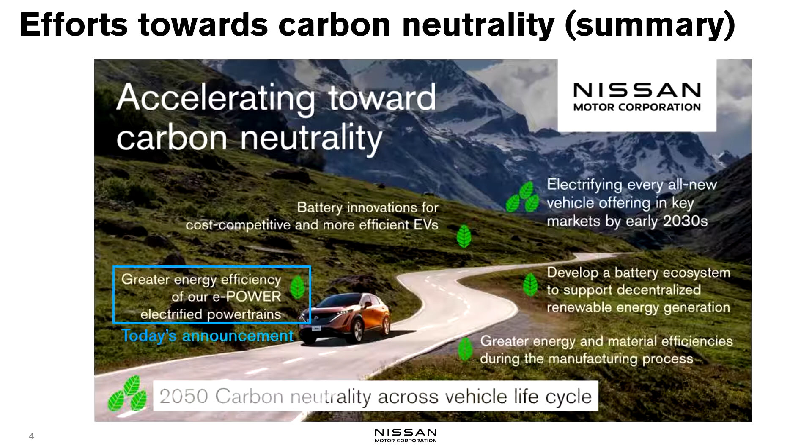As a specific example, these are the 4 actions we are taking that have been announced. From the left, we have greater energy efficiency of our e-power electrified powertrains, with a more thermally efficient EV. We are innovating battery technology and developing a battery ecosystem to support decentralized renewable energy generation, and greater energy and material efficiencies during the manufacturing process. These are the 4 areas or actions we are taking, and today I would like to focus on e-power with better energy efficiency.

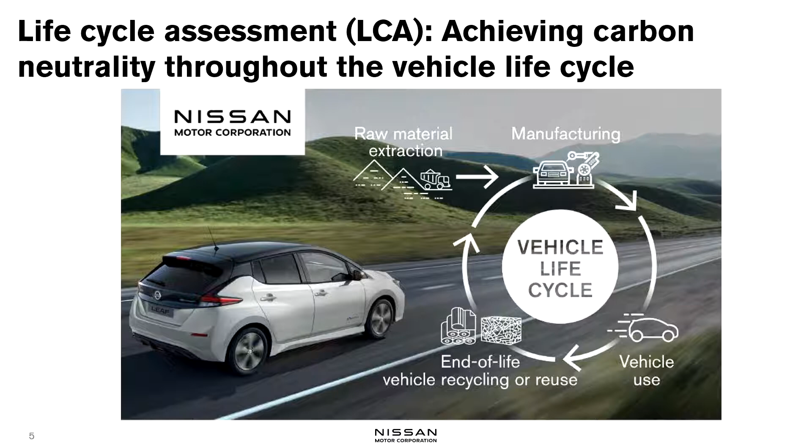Our approach to carbon neutrality is based on life cycle assessment—an entire life cycle assessment. It's not only about introducing carbon neutral vehicles. We are looking at the materials, mining, the entire life cycle, and the entire value chain. Across the board, we would like to reduce CO2 emissions throughout the life cycle, including the sourcing of materials.

As part of the electrification strategy, we would like to expand the application of battery EV, but penetration of renewable energy will take time, and when it comes to charging infrastructure and electrification, it will also take time. Therefore, in this process, carbon-free, CO2-free solutions are the area where we would like to contribute, and to this end we are using e-power as one of the pillars of electrification.

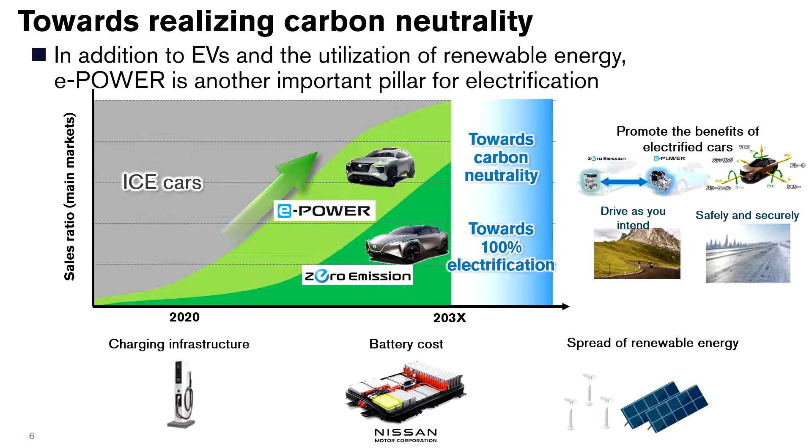In early 2030s, we would like to electrify all new Nissan vehicle offerings. As an action to penetrate the market with this technology, we will not only introduce electrified vehicles, but also make sure new values of electrified vehicles—free, flexible, and powerful—are things we communicate and make sure customers understand.

What we see today in IC, internal combustion engines, is downsized turbo with high thermal efficiency, which we see in larger numbers today. Three years ago, we introduced VCR. This technology is one of the downsized turbo engines with high thermal efficiency. This was the world's first technology that we introduced.

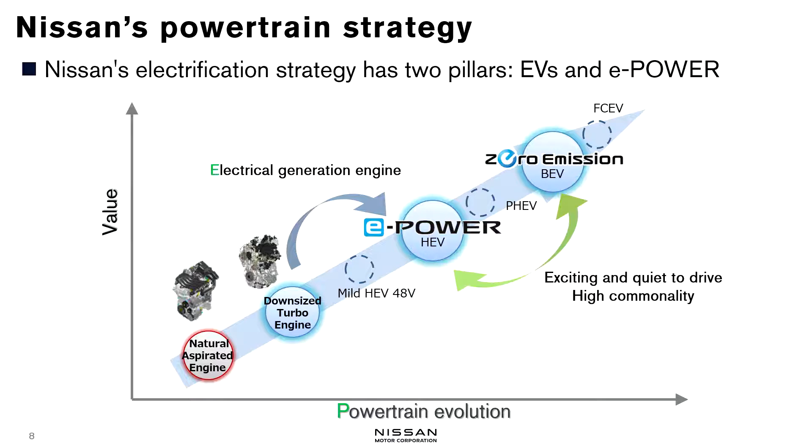In other words, as you can see in the small letters, mild hybrid and plug-in hybrid are where other OEMs are adopting in large numbers. With regards to these technologies, we will use alliance assets as a complement. But one of our pillars of engineering is e-power and zero emission, rather than working on mild hybrid.

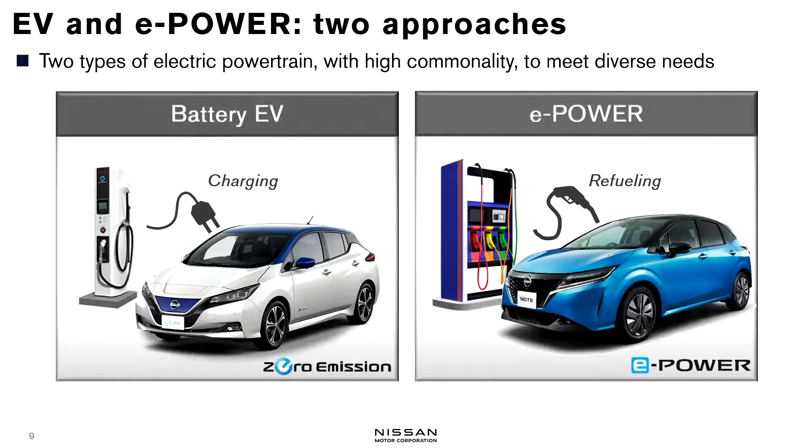As I said, battery EV and e-power, based on these two pillars, we are approaching electrification. But 100% motor driven is the same, we can say the same thing. The question is how to generate electricity, that's the big difference. In the case of battery EV, we use power from the utility company, whereas with e-power, gasoline is used to generate electricity. This is one big difference between battery EV and e-power.

And we are going to use these two technologies to reduce the CO2 in LCA, and this is the visualization of the efforts. While we manufacture vehicles, we emit CO2. And in order to generate power to drive, the CO2 emission is in yellow, and CO2 emission which is emitted during driving is in orange.

E-power's CO2 emission during driving is much less than ICE. However, battery EV is zero emission. But the CO2 emitted during the manufacturing of the vehicle, or the power generated to drive the car, to this end we need to emit CO2, and it depends on the electricity mix. As of today, you see this ratio is pretty high. So that is why people say that battery EV CO2 performance may not be as good as people say, if you look at it from the LCA viewpoint.

However, if you look at these two pillars of electrification, we are developing technologies to reduce the CO2 on both aspects. E-power, you see the orange one, which is the CO2 emission during driving, in order to reduce this we are maximizing thermal efficiency. With regards to EV, no CO2 is emitted while driving, but CO2 is emitted when the power is generated. But we will reduce this level, and CO2 emission to produce battery is being reduced.

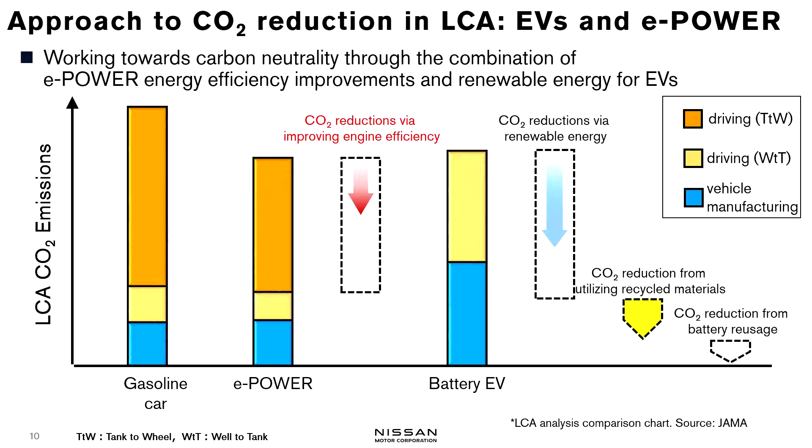And to this end, we are trying to reduce CO2 emission by recycling materials or reusing the battery. This is how we are trying to reduce CO2 emission on those fronts. Now, let me provide the details. Today, for zero emission, I will be very brief. I would like to have another opportunity to talk about zero emission in detail.

This is about how the EV has been evolving. As you can see, the Nissan Leaf's latest generation came in 2017, and since then Leaf e+, and last fiscal year we unveiled Ariya, where battery capacity increased from 40 kilowatt hour to 90 kilowatt hour, and the electrified powertrain has more power. This is how we deliver better driving performance and other performance. The latest Nissan Leaf has an autonomy of 400 kilometers, or with Ariya's 90 kilowatt hour it drives for 600 kilometers, although this is internally measured. This is the autonomy which is possible.

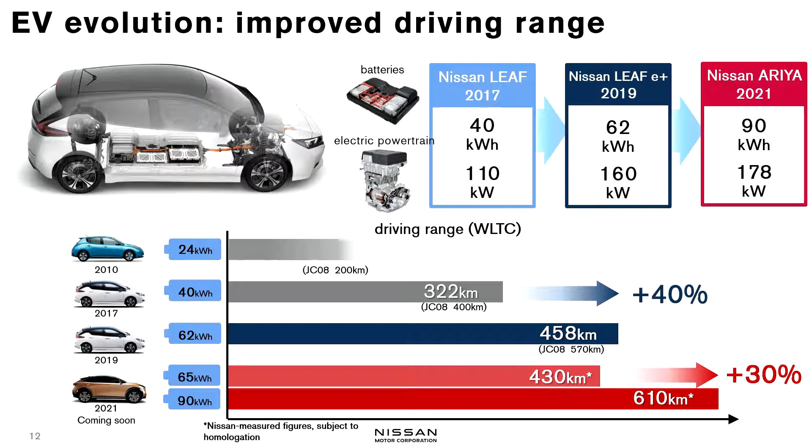So EV will be sufficient to use in your daily life. That's where we are today. In addition to this, battery circulation economy is what we are trying to develop. As EV penetrates the market, there will be an increasing number of batteries found in the market. So by recycling the battery, we would like to deliver new value while we reduce CO2 emission.

With the sales of vehicles, if we sell vehicles, they are no longer only a means of transportation. It will be a mobile storage battery, so it will be part of the energy solution. We call it V2X. We connect vehicles with houses, or connect vehicles with buildings, or connect vehicles with blue switch, or battery storage, storage batteries used for emergency. So as you can see, there are a lot of values of EV as a source of power. This is how we are going to enhance the value added of EV and reuse and repurpose, which is the second one.

After the end of life of the onboard battery, we can still use it for other purposes because we have better performance batteries now, so we can reuse it. For example, smart grid is one use for old batteries. If we use wind power generation and solar power generation as a source of grid power, we can use end-of-life onboard batteries. In order to promote this use as a source of grid power, we are talking to utility companies.

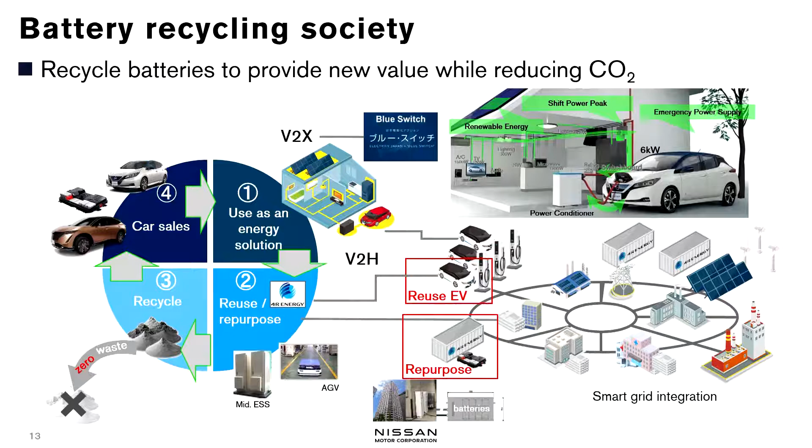Recycling is another option. With regard to end-of-life batteries, we will break them down into nickel, cobalt, and lithium raw materials so we can reuse them to produce new batteries. So we are going to create a battery circular economy.

Now let me talk about our subject today, e-power. What is e-power? Let me define it. You see the battery EV at the top, and at the bottom you find e-power. As you can see, battery EV has a big battery, and using power from the utility company, we charge the vehicle. As a result, the motor drives the vehicle 100%. This is battery EV.

In the case of e-power, the motor is used as the drivetrain, and we use common parts with battery EV. The battery capacity is 1/50th of the battery EV. We generate power using gasoline as fuel, so the utility company is essentially within the vehicle, but the car itself is driven by motor, identical to EV.

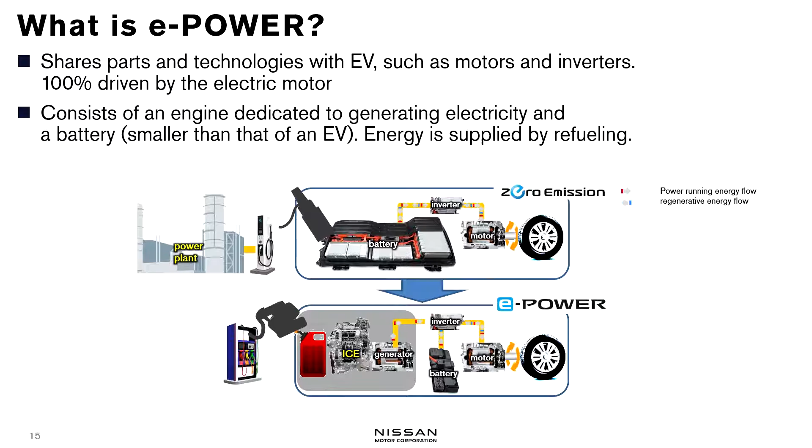Thanks to 100% motor drive, e-power is as attractive as EV, with powerful and smooth driving and acceleration compared with traditional hybrid. Standing start and acceleration is better, and smooth acceleration is highly appreciated by users.

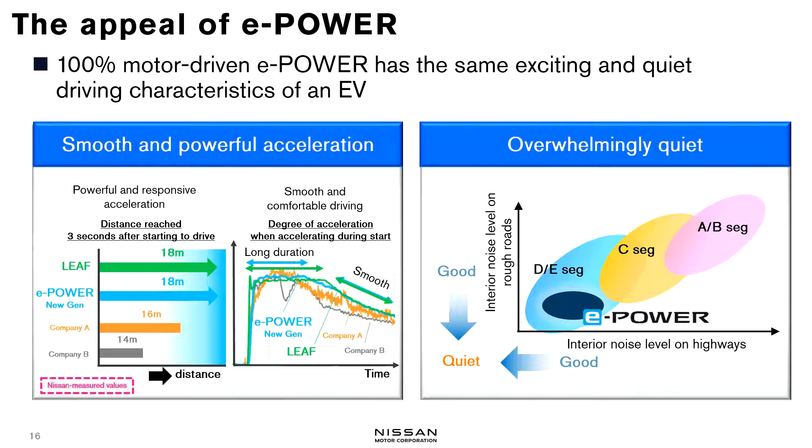As you can see on the right, we find it overwhelmingly quiet. In the new Note, it is equivalent to D-segment when it comes to quietness and riding comfort, and this is well received in the market.

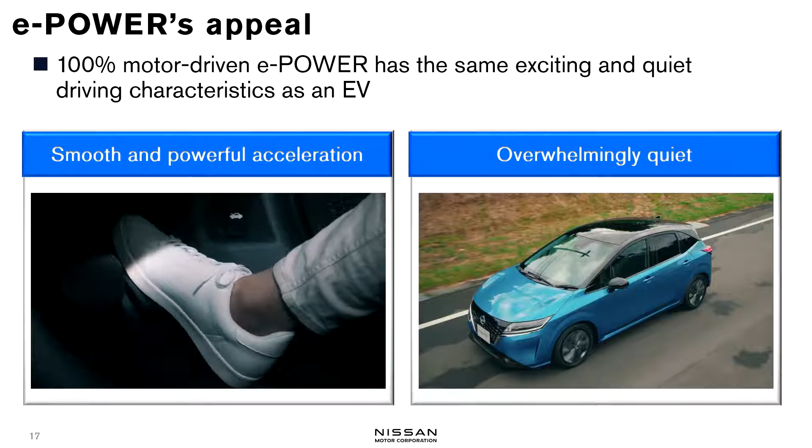On the left, you find smooth and powerful acceleration. You are seeing how the car drives. Thanks to the motor's high rotation and high driving performance even at low speed, with excellent control from standing start to acceleration, it's very smooth and powerful.

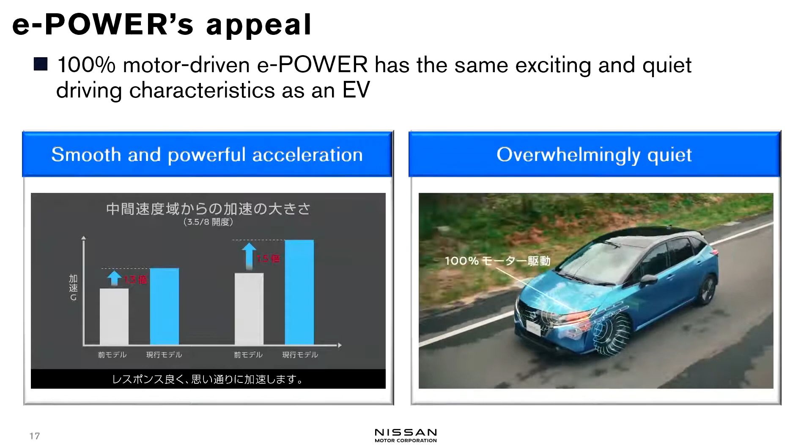In addition, overwhelmingly quiet is on the right hand side. With the new Nissan Note, the unevenness of the road surface is sensed and the vehicle automatically gauges the road noise. When road noise is high, it generates power; when road noise is quiet, the engine will not be used to generate power. Through this careful control, we provide a very quiet cabin. This is how it works.

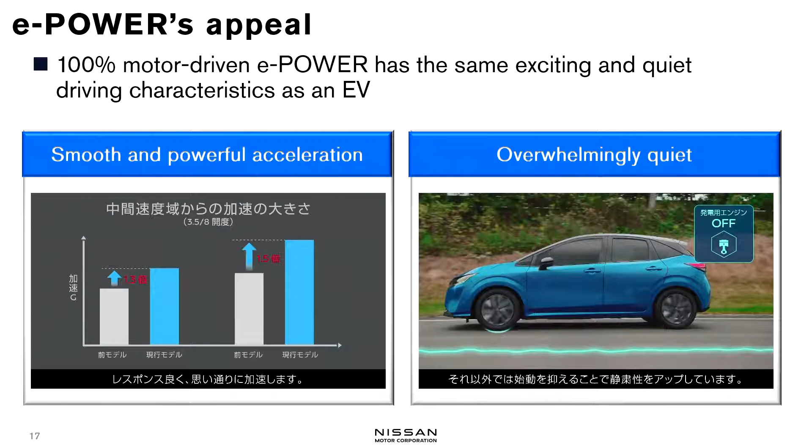Next page, please. This is the further evolution of e-power. How far will this dedicated electricity generator engine be developed? This is what I would like to describe.

I use the expression thermal efficiency. If the energy that gasoline provides is 100%, our existing ICE uses 60% for exhaust, friction, and other purposes, so only 40% is used to drive the car. With the latest engine, only 40% is used. In the past 50 years, we have increased thermal efficiency from 30% to 40%, but to increase it by 10 percentage points took 50 years.

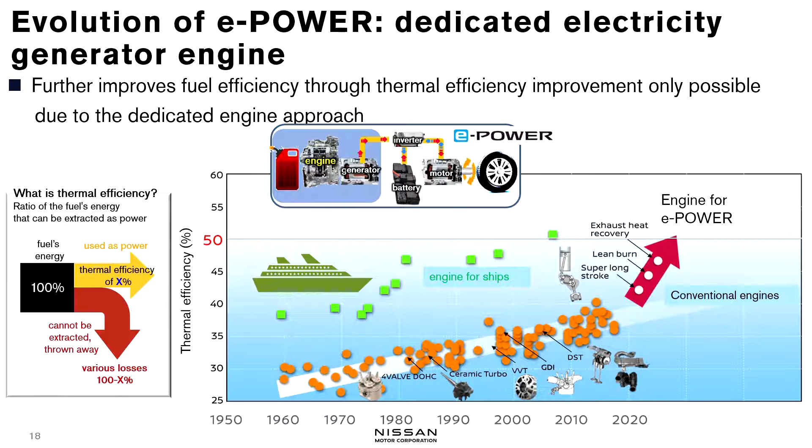But with e-power, in just several years, we can increase it to 50%. That's the target of the engineering community. What does 50% thermal efficiency mean precisely? Why did we set this goal? It sounds good - that's one reason. And since we have been involved in ICE development, we believe the ultimate, challenging goal is 50%. That's another reason.

By changing the role of the internal combustion engine, we may be able to achieve 50% thermal efficiency. With this in mind, we have set this goal of 50% thermal efficiency.

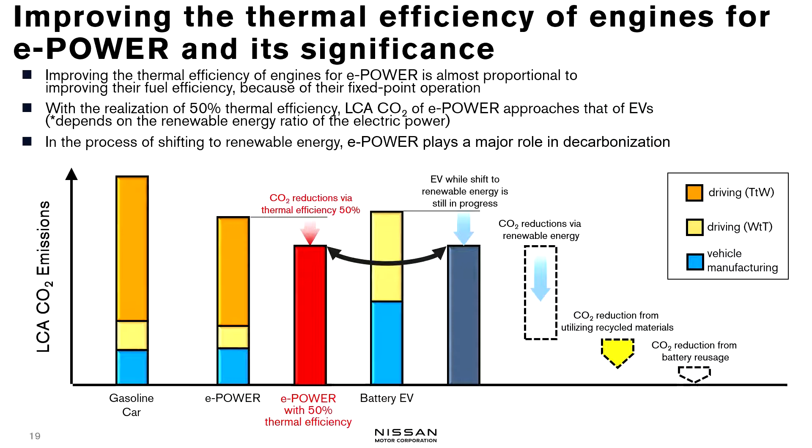And this level corresponds to 50% thermal efficiency. So in the process of EV evolution, we need to attain this 50% thermal efficiency. That is why we are taking on the challenge to achieve it. Now I would like to hand it over to Tsurushima-san about how we are attaining 50% thermal efficiency.

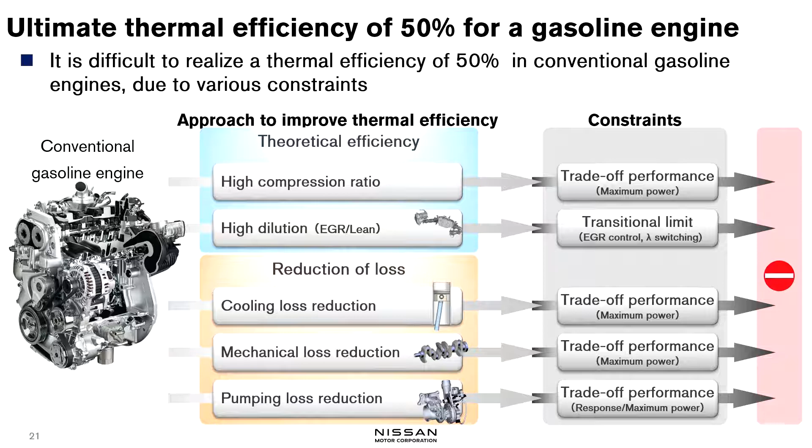Now, for Nissan engineers, have we given up on this 50% target? No, that is not the case. For Nissan, we have e-power, and e-power has a different role. The role of e-power has drastically transformed. So Nissan engineers, against this change in the role of engines, have seized this as an opportunity to improve thermal efficiency, and we are now envisioning fixed point operation in addressing this challenge of 50% thermal efficiency.

So next, let's talk about why e-power was able to improve fuel efficiency. For one thing, it's the way the engines were used in e-power. Please take a look at the graph. This shows you conventional ICE and e-power, and the difference in how these are used. The left-hand side shows conventional ICE, and the right-hand side shows the frequency of e-power and conventional ICE.

We show you engine torque and engine speed on the vertical and horizontal axis. Now you'll see an eye socket-like area - this shows you the best thermal efficiency area. The blue bubble's size shows the time in which the engine is utilized. If we look at the distribution of the bubbles between conventional ICE and e-power, the distribution is different, which means the use of the engine varies between the two. In the case of conventional ICE, the engine and tires are connected, so at low speed and idling, engine thermal efficiency deviates from the best thermal efficiency area. In the case of e-power, there is no link to the tires, which means you're able to stay in the best thermal efficiency area throughout. That is the reason why e-power's fuel efficiency is better.

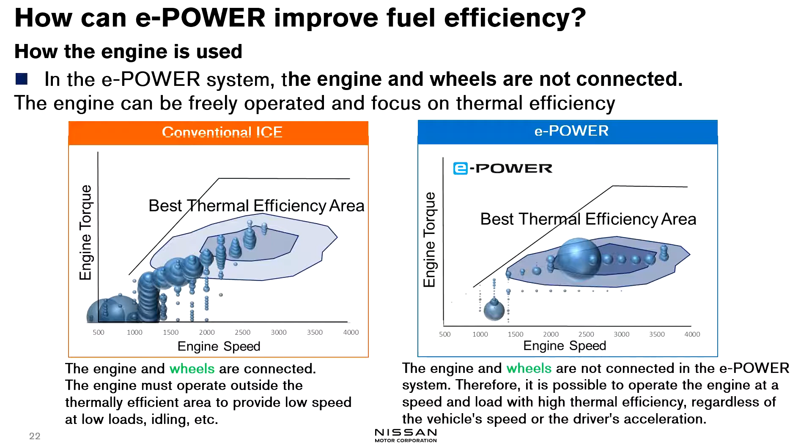Next, why is it that e-power's specialized design can achieve 50% thermal efficiency? Let me explain that as well. The left-hand side shows torque on the vertical axis and engine speed on the horizontal, and the blue shows the best thermal efficiency area for the conventional engine, and the red for e-power.

With regard to the next generation e-power, which we're developing, acceleration will be ensured by the battery. Therefore we will not have to have a broad operation range in torque. We'll also be able to cut back on the maximum rotation, which means as far as the engine structure is concerned, without needing a very broad operation range, we're able to focus on the best thermal efficiency point.

And we're able to have the maximum output. Furthermore, the right-hand side shows you the e-power, the future evolution of e-power. The battery technology will have evolved.

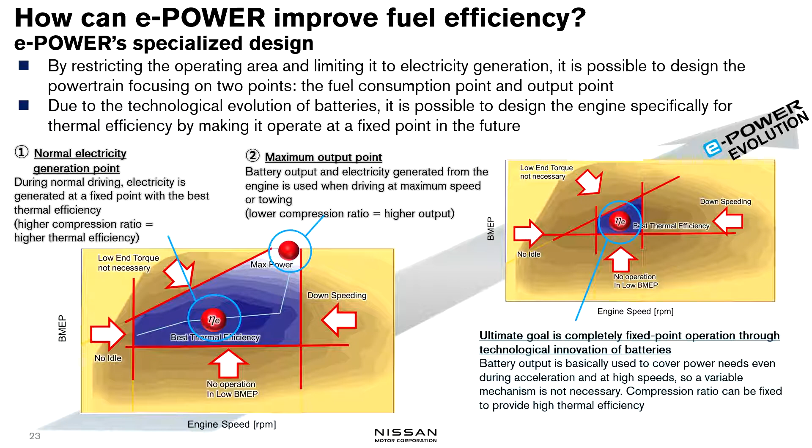Battery output is basically used to cover power needs, even during acceleration at high speeds, which means we'll be able to have fixed point operation. In that case, output will no longer have to be considered, which means we're able to have high compression so we can focus on the engine, which means we're able to realize high thermal efficiency as a result of that structure.

Next, in order to achieve 50% thermal efficiency, what are some of the key technologies? The left-hand side shows the compression ratio and the theoretical thermal efficiency. This shows you how heat is translated into energy in a very efficient manner. As this ratio is high, it means the efficiency is high.

If we are to achieve 50%, we need to improve the theoretical efficiency. We need high compression ratio, and we also need to increase specific heat ratio for that purpose. With regard to high compression ratio, we need technology that mitigates knocking even at high compression ratios. We're able to achieve early closing Miller cycle, strengthen in-cylinder gas flow for rapid combustion, and we have adopted cooled EGR.

Second is to increase specific heat ratio. Of course, we need to have mass EGR and lean combustion. So therefore, we need technology that can stably burn even with high EGR or lean combustion. To achieve high EGR and lean combustion, we need a stable ignition system. We need to strengthen in-cylinder gas flow to ensure combustion, and also achieve a high energy ignition system.

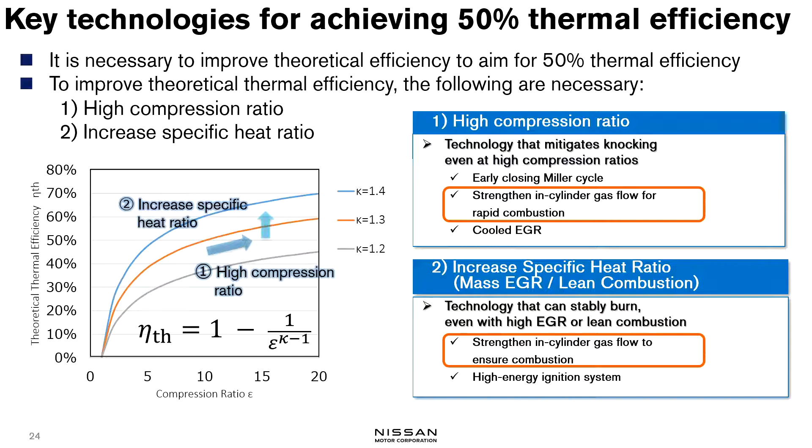Today, I would like to introduce the in-cylinder gas flow structure that ensures combustion. This is the key technology. Now let's focus on high EGR and lean burn. These are technical issues for achieving high dilution combustion.

The right-hand side shows high dilution. Compared to the theoretical ratio, the air is 2 times, so this is lean combustion. In this video, you'll find that the combustion is still robust. In the case of lean burn, particularly in the initial ignition, the speed is very low, and initial flame nucleation is very slow, as you can see.

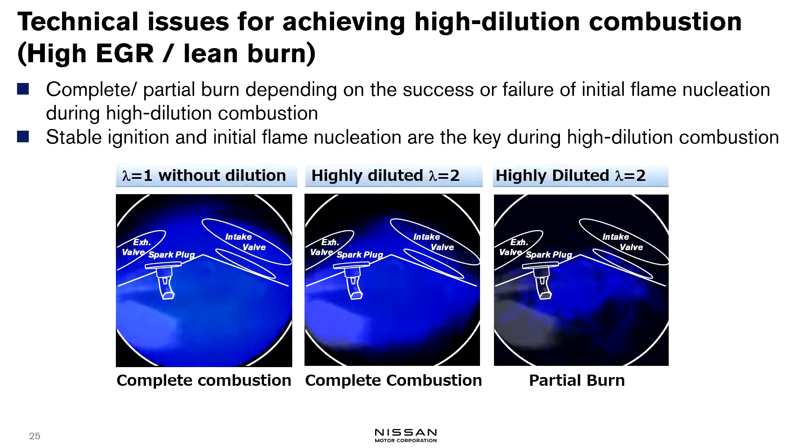Now, on the right-hand side, we're showing you where the air is 2 times. This is the initial flame, and the initial flame nucleation is not working out very well. The combustion is very slow, and we end up with a partial burn as a result of the failure in initial flame nucleation. So, as a result of visualization, high EGR lean burn requires strong initial flame nucleation. Initial flame nucleation is the key. Having stable ignition and good nucleation really represents the key to success.

Here we show you the technical issues for achieving high dilution combustion, high EGR, and lean burn. This is the initial flame nucleus, and this is where we have good combustion. For the ignition plug, we have an appropriate flow velocity to the spark plug, which creates a discharge channel in a C-letter shape.

The discharge channel is working. As you can see, if the discharge channel is extended in an appropriate manner, they're able to supply energy. There's sufficient space to offer energy, which means stable energy supply can be done, enabling initial flame nucleation to be achieved. Against this backdrop, the left-hand side shows where the ignition plug flow is very slow, where the flow velocity to the spark plug is slow.

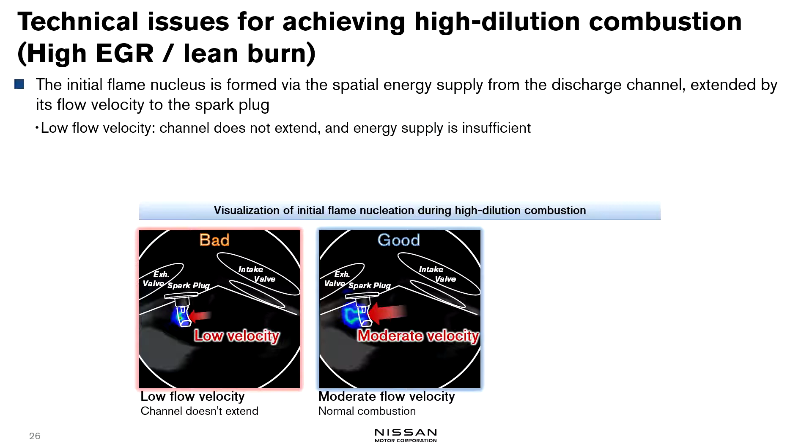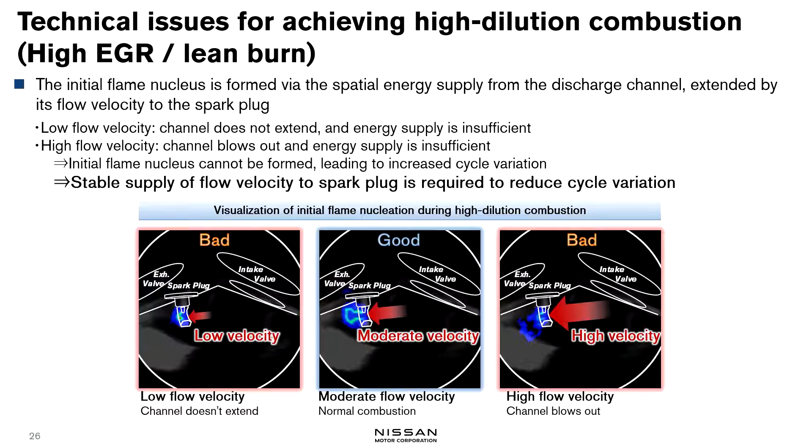If the discharge channel is not extended, energy supply will be insufficient, so initial flame nucleation cannot be done. On the other hand, if flow velocity is too high, it puts out the ignition, which also means initial flame nucleation cannot be formed. So the engine will vary from cycle to cycle, there are always variances. It's important that we reduce the variances and offer stable flow so that initial ignition can be supplied, and that we have a stable discharge channel developed.

This shows what needs to be done in order to create a stable discharge channel. This is the concept we developed: STARC combustion. STARC represents Strong Tumble and Appropriately stretched, Robust ignition channel. STARC for short, it's an acronym.

The STARC combustion is where you have a tumble in the cylinder. You have strong turbulence in the cylinder, and when the piston rises that turbulence will be maintained, and the maintained turbulence will carry the discharge, allowing for the extension of the discharge channel.

There are two keys to this concept. First, on the left-hand side, when the engine intakes air, we had to prevent disturbance and maintain stability. In the central picture, during compression, the tumble flow is maintained without any bending. It's important that there be control at the center of the cylinder space, maintaining it until the ignition point. With that, we'll be able to have stable combustion without disturbance.

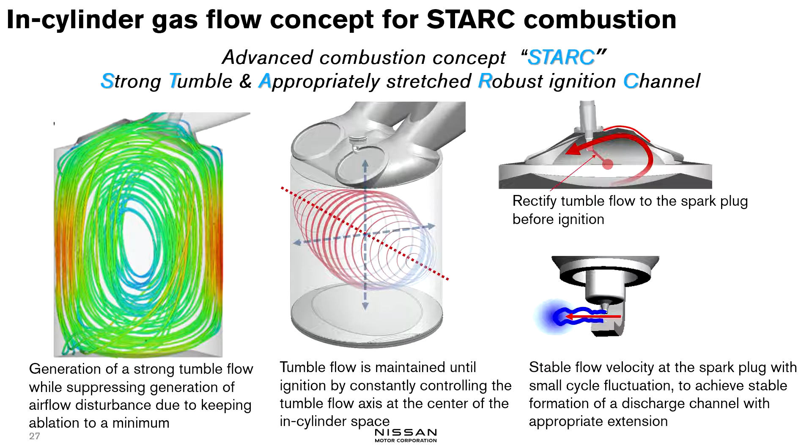It's difficult for you to imagine, but air is provided to the spark plug 20 times for every second. That is the technology required.

So in actuality, how did we verify and design this STARC concept? As mentioned earlier, what we want to realize is the same airflow being provided 20 times each second, to maintain the stable discharge channel. We need to create strong flow and control, adjust the turbulence, and provide the same flow to the visualization engine.

This shows a side picture from the in-cylinder gas flow simulation, viewed from the side. The left-hand side shows the in-cylinder gas flow for the current engine, and the right-hand side shows the in-cylinder gas flow for the STARC concept. In the current engine, the tumble disintegrates when the piston rises, as you can see. On the right, with the STARC concept, the airflow stays in the center of the cylinder and is maintained even all the way through compression.

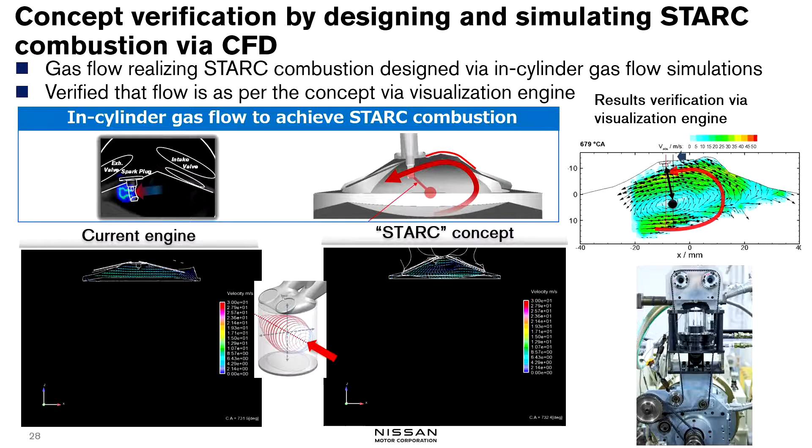So we verified whether or not this was assured. We carried out PIV visualization to verify results via the visualization engine, and the airflow was visualized as a result of the simulation. You'll find that the in-cylinder gas flow has been verified - we're able to realize the outflow within the in-cylinder gas through this design. Next, in the actual engine design, what was the result?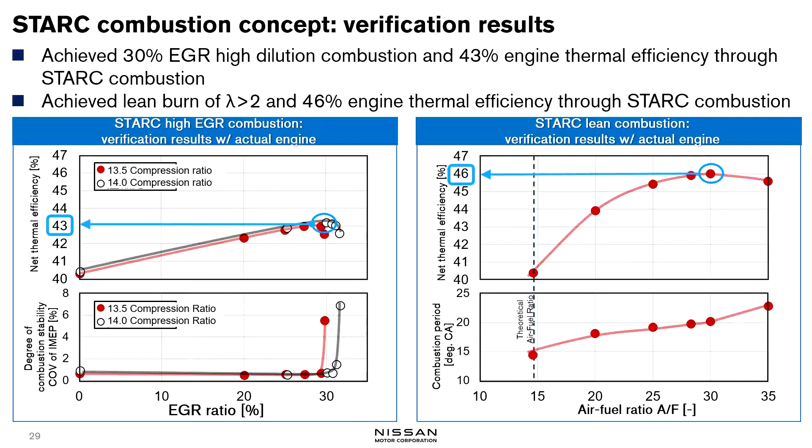The right-hand side shows the same engine where we carried out lean combustion and the results thereof. The top shows the net thermal efficiency, and the bottom shows combustion period. As a result, even with twice the airflow, we were able to maintain and achieve 46% engine thermal efficiency through STARC combustion.

Last but not least, this shows the roadmap to achieve 50% thermal efficiency. As a dedicated e-powered engine on a standalone basis, we're able to have 43% efficiency, but by combining with other technical development going forward to further improve thermal efficiency through lean combustion, on a standalone basis we want to achieve 46% thermal efficiency - this has also been verified. And because of heat recovery, we believe it's possible to achieve thermal efficiency of 48% down the road with improvement in battery technology.

Based on total fixed point operation, we'll be able to improve the friction and compression ratio, which means we'll be able to achieve 50% thermal efficiency. That is now within a possibility.

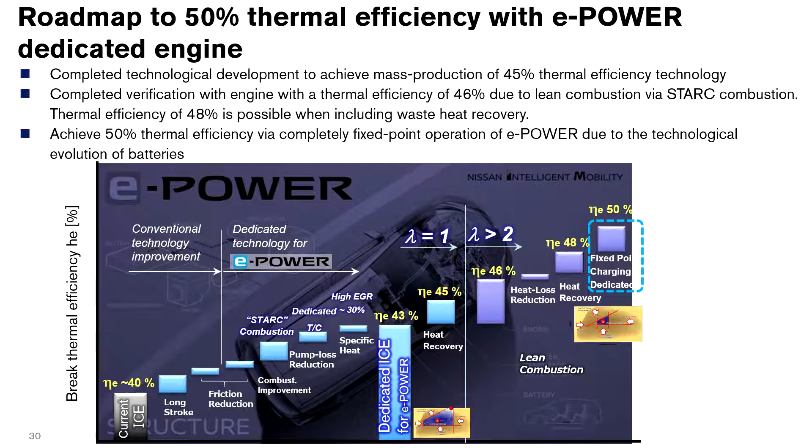So last but not least, we're very excited to achieve the highest level of fuel efficiency. We have a team of wonderful engineers who have consistently worked very hard to achieve this. I just wanted to point that out.

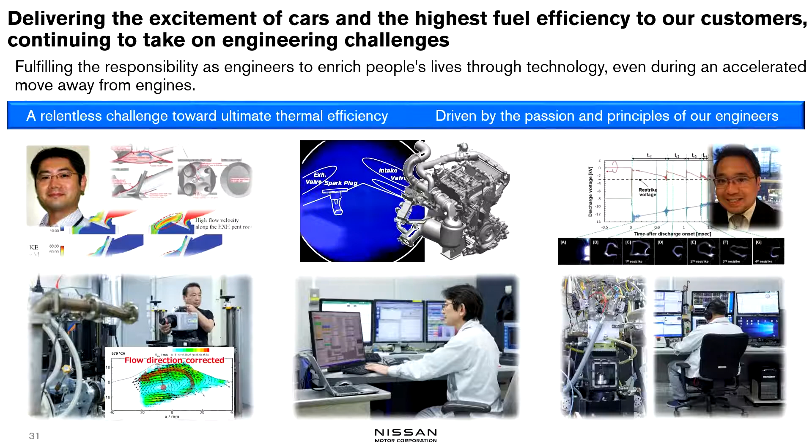So toward electrification, do we really need to further the ICE technology, even against electrification? There are some negative views, but we have experts in various domains as part of the team, and we constantly want to offer something better for the customers. We want to offer better fuel efficiency cars for our customers so that they'll have a more comfortable and fun driving experience. So that is the thought behind our development process.

As a result, we believe that we'll be able to fulfill the responsibility as engineers to enrich people's lives through technology. This is something that we have always endeavored to achieve. So that's all from myself. Thank you very much. Then we would now like to turn to the conclusion.

As I said in the beginning, with e-power and battery EV, by using these two as the pillars, by 2030, early 2030s, we would like to provide a new lineup offering at 100% electrified vehicles. Battery EV consists of evolution of battery and eco cycle. With this, we would like to embody or realize carbon neutrality.

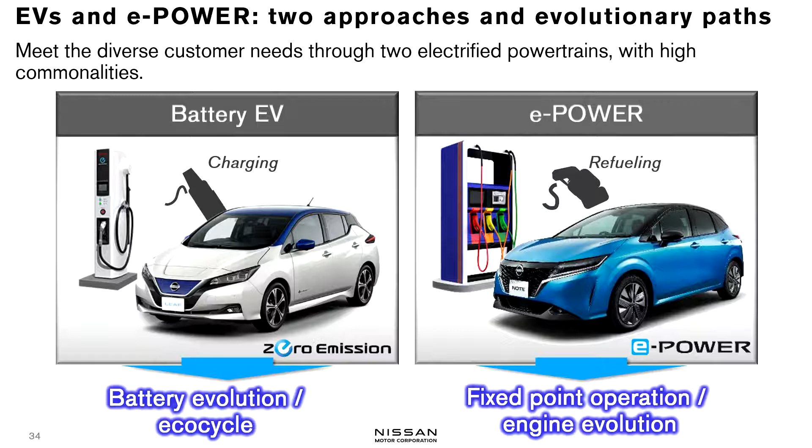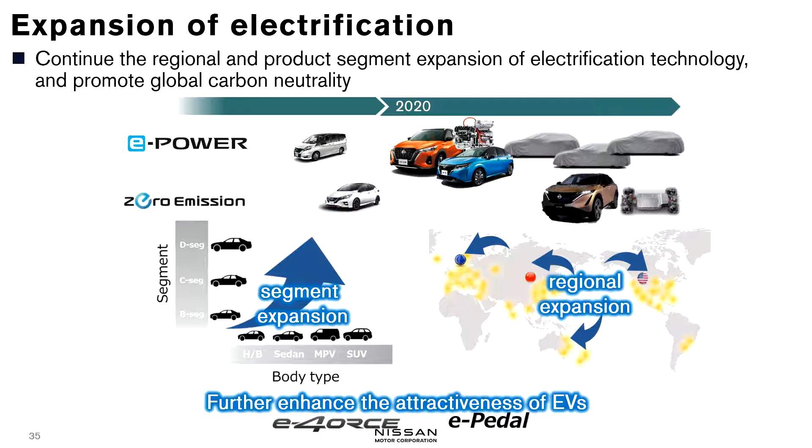As I said, e-power is in fixed point operation with further development of the engine. It will contribute to being another critical pillar to pursue a carbon-free society before EV totally penetrates the market. In Japan and some of Asia, e-power application has been widening. This fiscal year, we would like to widen the application in the segments as well as the regions.

In order to apply more electric vehicles, it's not only about fuel efficient cars or CO2 emission reduced cars. We need to increase the attractiveness of electrified vehicles so that it's more convenient and more intelligent. We should always deliver new customer values. It says new driving experience.

By using the characteristic of the motor, you will feel as if your car is part of your body. Natural operation or manipulation will be possible, whether it's flat ride control or the control system, which will never let the vehicle skid. And we unveiled e-4ORCE at the motor show, and we are going to develop further on e-4ORCE.

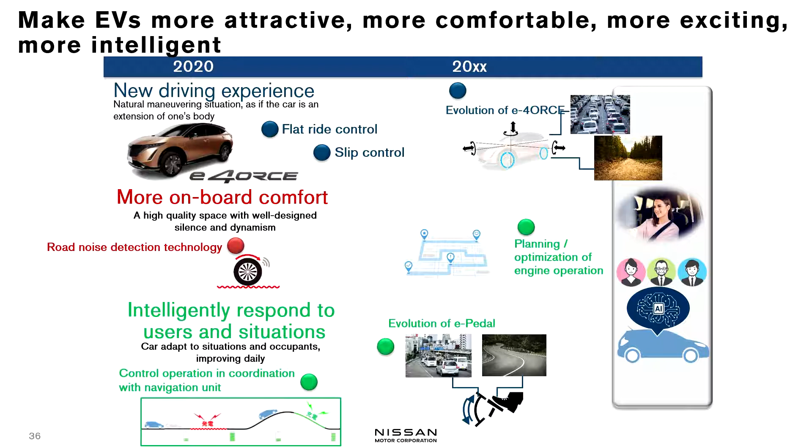As I said in the middle of the presentation, we measure road noise while we ensure quietness of the cabin is the area where we continue working on, so that the car will adapt to the circumstances, whether it's a passenger, driver, or environment. So it will be coordinating with navigation and learn the driving scenes. These are the areas of evolution that you can expect from us.